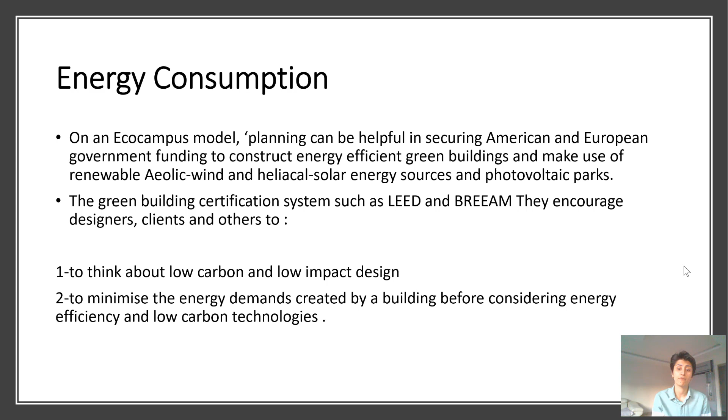Energy consumption aspect. An eco-campus model plan can be helpful in securing American and European government funding to construct energy efficient green buildings and make use of renewable wind and solar energy sources in photovoltaic parks. Green building certification systems such as LEED or BREEAM encourage designers, clients, and others to think about low carbon and low impact design and to minimize the energy demands created by a building or by the campuses before considering energy efficiency and low carbon technologies.

The transportation issue has generated a series of direct and indirect effects that should occupy a central position in university policies. In addition, for students living off campus, automobiles are by far the principal choice of transportation. However, buses are used by many students, but bicycles are still fairly rare. Only those students who live on campus walk as the principal mode of transportation to classes, and even in this class, there are more students who use private vehicles.

A framework has been suggested for ecological building design. There are 4 main strategies: building design with reduced use of material and selection of ecological material. Strategy number 2, decreasing water consumption. Number 3, the use of renewable energy like sun or wind, in addition to transformation of this energy to another form. And at the end, there is conservation of the natural environment, design of ecological cities, design for human health, raising ecological awareness. And I have put some methods for how we can achieve these strategies.

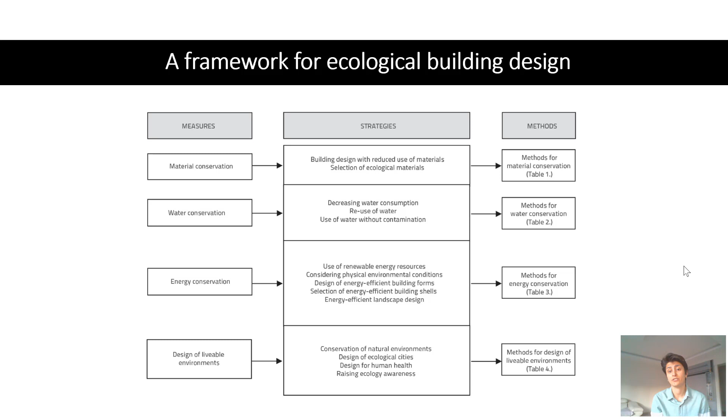You can see the methods for material conservation, and there are methods for water conservation, in addition to energy and livable environment. So for material conservation, there are 2 methods actually. Building design with reduced use of material, which I tagged as MC1, and there is MC1.1, MC1.2, etc. till we reach MC1.4, and the selection of ecological material I tagged as MC2. So MC1.1 refers to reducing the surface of the building shell in the design, or anything related to building design material, while MC2 refers to the selection of any ecological material that can be reused or recycled.

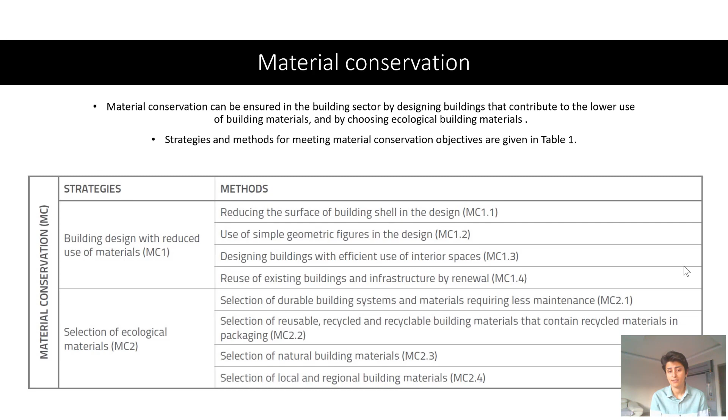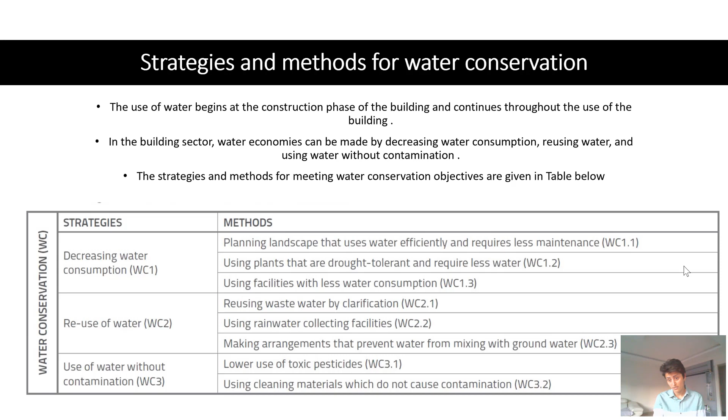Strategies and methods for water conservation. The use of water begins in the construction phase of the building and continues throughout the use of the building. In the building sector, water economies can be made by decreasing water consumption, reusing water, and using water without contamination. The strategies and methods for meeting water conservation objectives are given in the table below. There are actually 3 strategies. I tagged them accordingly from WC1 to WC3, and we have some methods for each strategy as you can see in the table below.

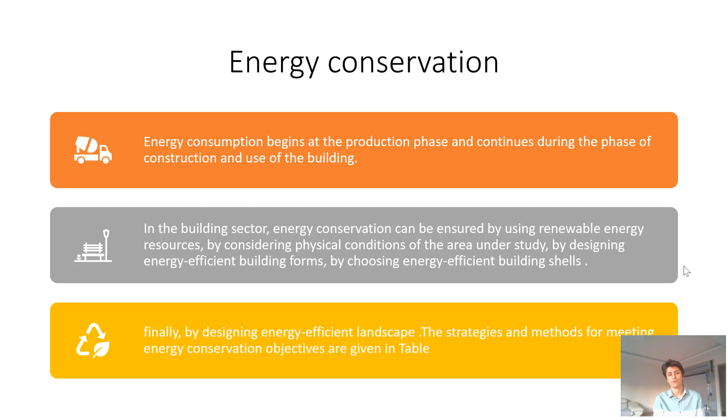Now, design for livable environments. The basic objective of the building sector is to create an artificial environment with due regard for the safety, health, physiological needs, and productivity of the users. In these environments, human beings and other living and non-living organisms have to share

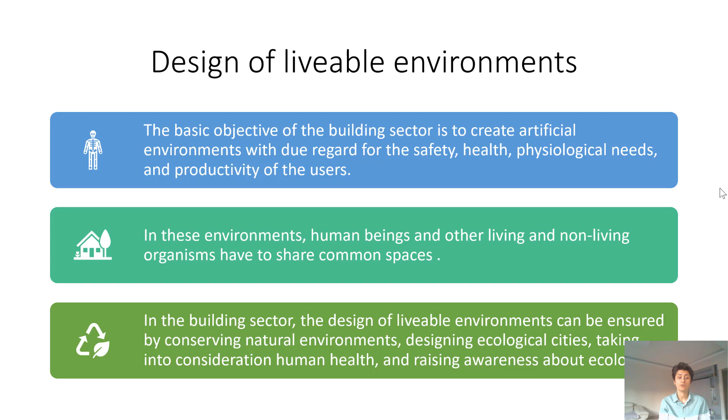common spaces. In the building sector, the design of a livable environment can be ensured by conserving the natural environment, designing ecological cities, taking into consideration human health, and raising our awareness about ecology. There are strategies and methods for designing livable environments: the conservation of the natural environment, designing ecological cities, design for human health, and raising ecology awareness.

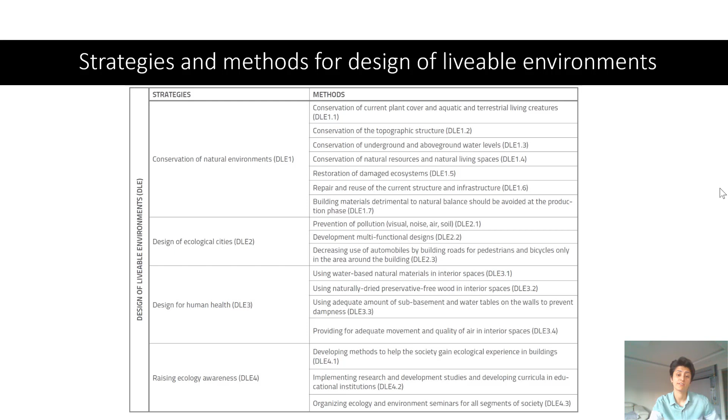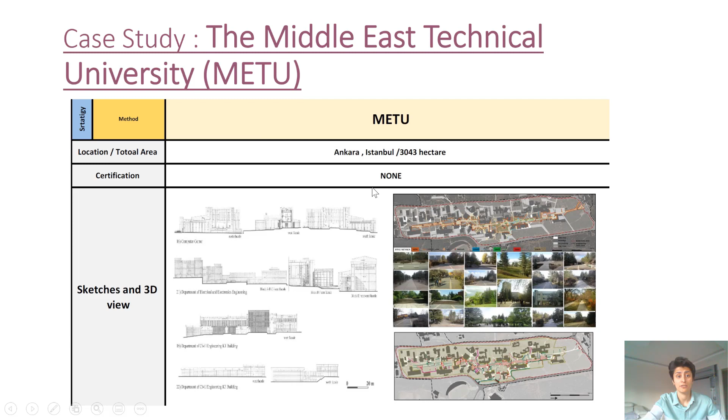And there are methods or approaches to achieve these strategies. As you can see, each method has been tagged from DLE 1.1 to DLE 1.7. And these strategies have been analyzed on 4 or 5 case studies, international and local case studies, and have been compared as following. The first case study is the Middle East Technical University, and we will see the Excel sheet.

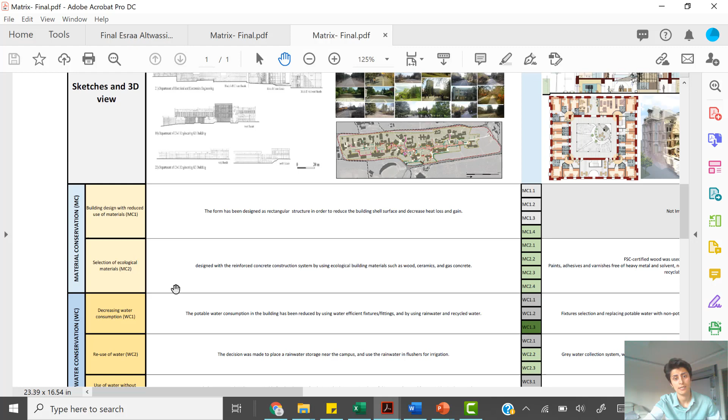Here we can see the matrix comparison in eco-campuses. For example, METU, the Middle East Technical University, there are sketches for this university, as you can see, and there is a 3D view. For the material conservation and the methods that have been applied, I have mentioned the methods for each university. We'll take this university as an example.

The form has been designed as a rectangular structure in order to reduce the building shell surface and decrease heat loss and gain. So this method of achieving the building design with reduced use of materials has been achieved: MC1.1, 2 and 3, and number 4 has been achieved the strongest.

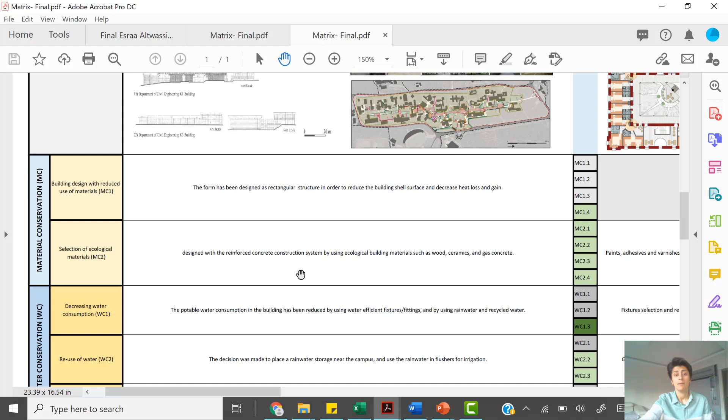Selection of ecological material: designed with a reinforced concrete construction system using ecological building materials such as wood, ceramic, and gas concrete. For water conservation, there are 3 strategies: decreasing water consumption, the reuse of water, and the use of water without contamination.

The potable water consumption in the building has been reduced by using water-efficient fixtures and fittings and by using rainwater and recycled water. The decision was made to place a rainwater storage near the campus and use the rainwater in flushers and for irrigation. Local plants are used as they are suitable for the climate of Ankara and tolerant against harmful insects. The needs for

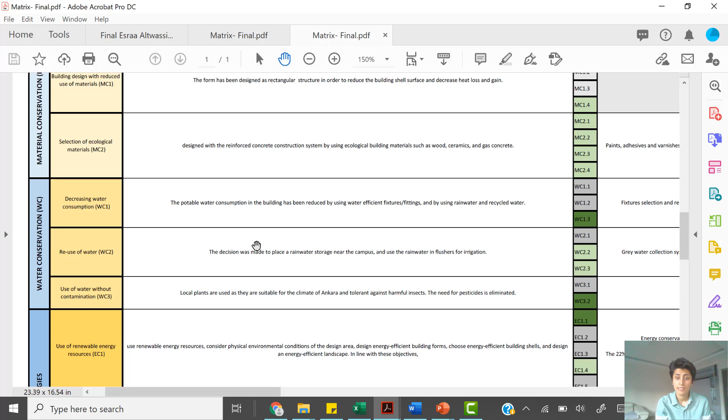to be eliminated. The energy consumption strategies use renewable energy resources considering the physical environment conditions. The dominant sunlight direction in Ankara varies between south and 30° east and 30° west of south. The decision was therefore made to direct the rectangular shape towards south to increase the solar gain.

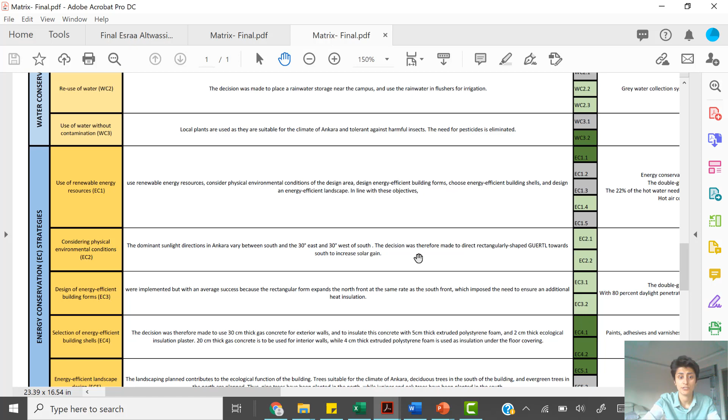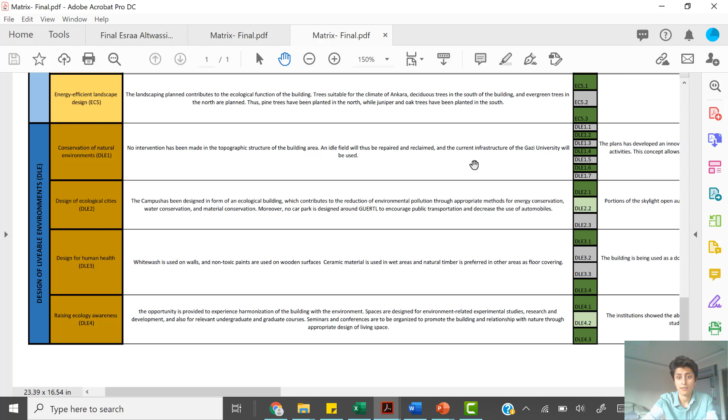And at the end I will end with design for livable environments. No intervention has been made in the topographic structure of the building area. An idle field was thus repaired and reclaimed, and the current infrastructure of the Gazi University will be used.

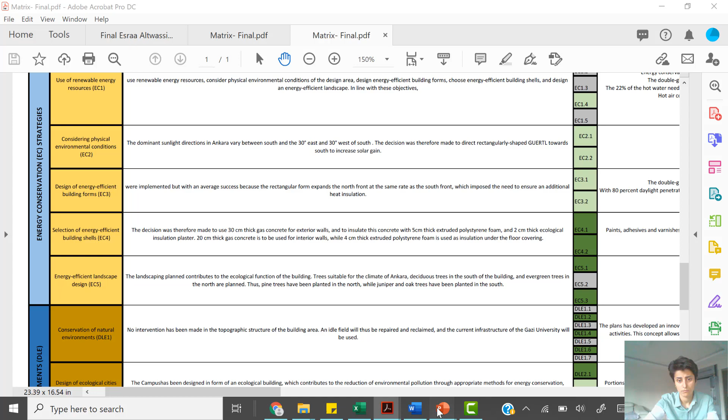So, in conclusion, the results emphasize the gaps among vital sustainability actions. In order to build a meaningful comparison among different cases, the approach introduces the need to consider and classify cases according to the following macro features: first, spatial structure; secondly, the climate zone; and finally, the host functions for each case.

At the micro scale, the need for revising and substituting current eco-efficiency driven indicators with more life cycle and user-centered metrics is also proposed, with some examples regarding the energy issue. The adoption of an annual user satisfaction survey can offer great opportunities to track the post-occupancy effect of a strategy for energy reduction, to profile the levers and the cultural attitudes of the university community, and to tailor internal temperature thresholds according to single magnitudes of acceptance.

Such a new approach, attentive to local constraints and long-term tracking of the outcomes rather than absolute records of taken actions, can help build homogeneous university case studies framed accordingly in clusters to find similar and scalable successful practices, and also in self-monitoring progress toward achieving a truly sustainable university campus.